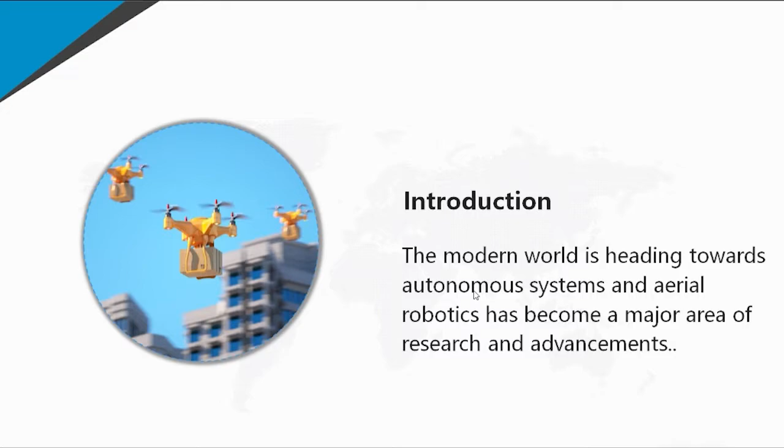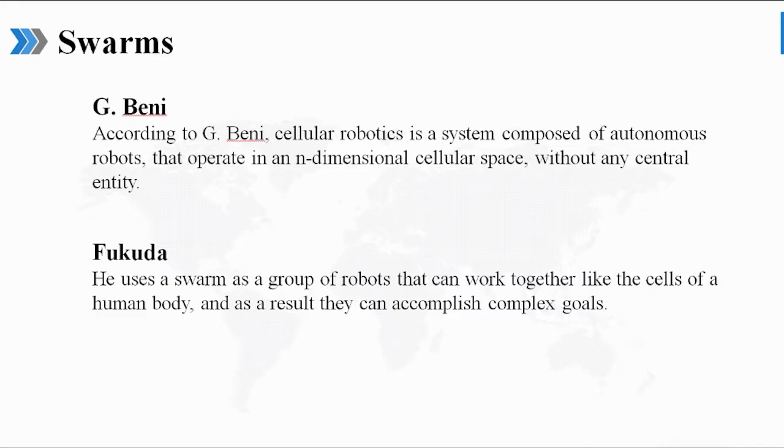Okay, this is swarms. Swarms are a collection of many UAVs or drones. This is a drone, and a lot of drones can be a swarm. Okay, aerial swarm robotics. Aerial swarm robotics are unmanned aerial vehicles that can operate autonomously. Every individual robot has its processing, communication, and sensing capabilities.

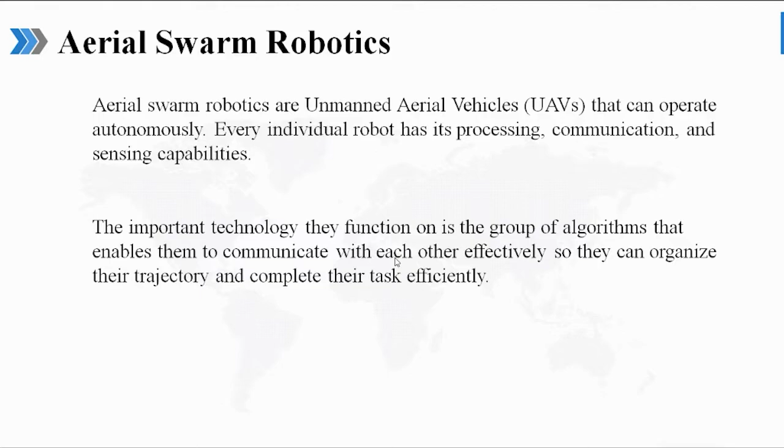Advancement in the field of materials and communication makes way for aerial swarm robotics. It is an important technology. They function through algorithms to achieve complex goals, enable them to communicate with each other effectively, plan their trajectory and accomplish their missions.

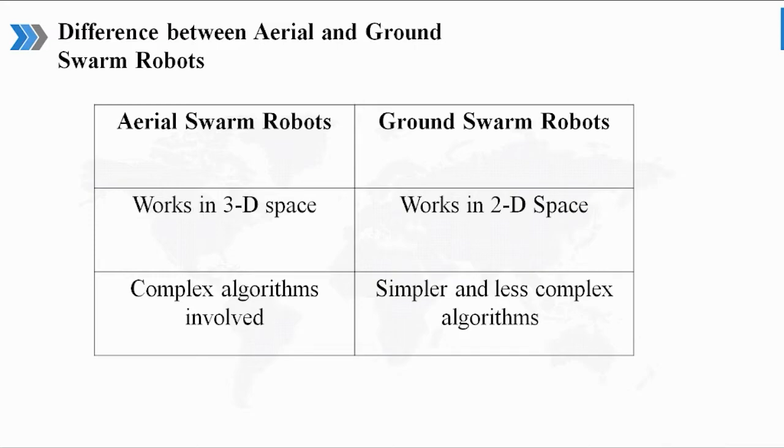Okay, difference between aerial and ground swarm robotics. Aerial swarm robotics can work in 3D space. Ground swarm robotics work in 2D space. Aerial swarm robotics have complex algorithms, and ground swarm robots have a little less complex algorithms. They may have simple algorithms. Okay, these are some characteristics of aerial swarm robotics, 3D and swarm autonomy.

The technology of aerial swarm relies on effective communication between aerial robots working in the same 3D environment, performing the same or multiple tasks depending upon the requirement. The notable innovation for swarm is the group of algorithms that enables one individual swarm to communicate with another individual swarm to sync their flights by themselves, plan their direction, and facilitate their journey in such a way that general goals of the swarms are accomplished.

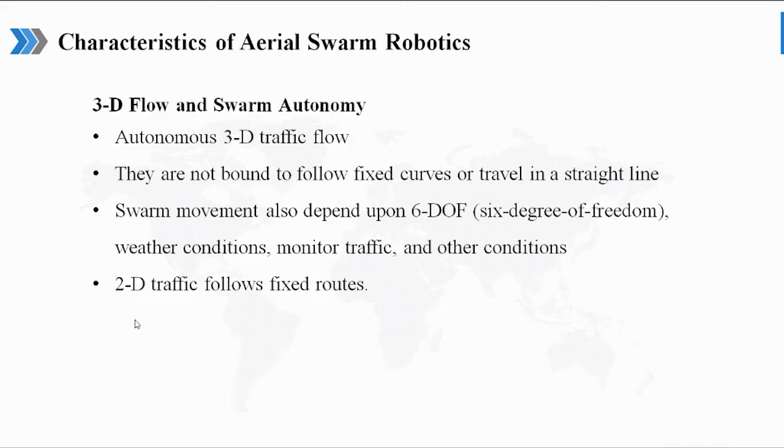2D traffic flows on fixed routes. 3D has a lot of directions, 6 degrees of freedom. Next slide. Okay. Scalability through hierarchy and multimodality. For working of swarms on a large scale, we require complex and efficient algorithms.

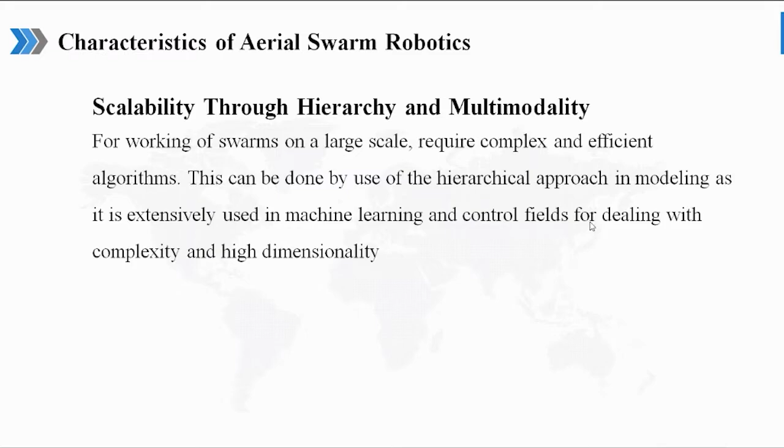The notable innovation for swarms is the group of algorithms that enables one individual swarm to communicate with another individual swarm. Communication is a main factor in aerial swarm robotics, and this is also done extensively in machine learning and control fields for dealing with complex and high dimensionality.

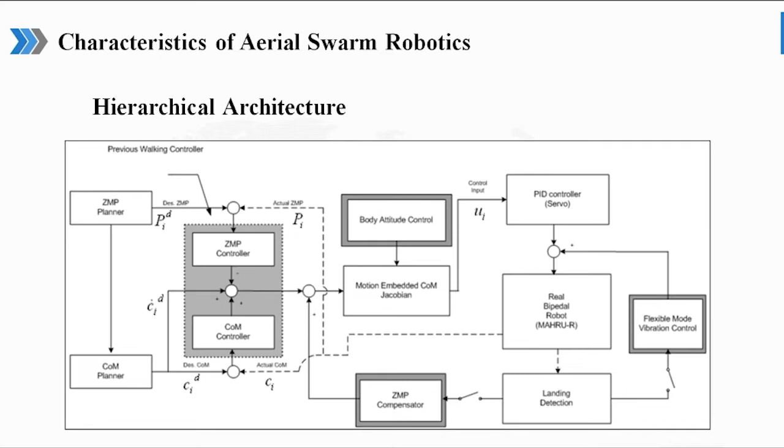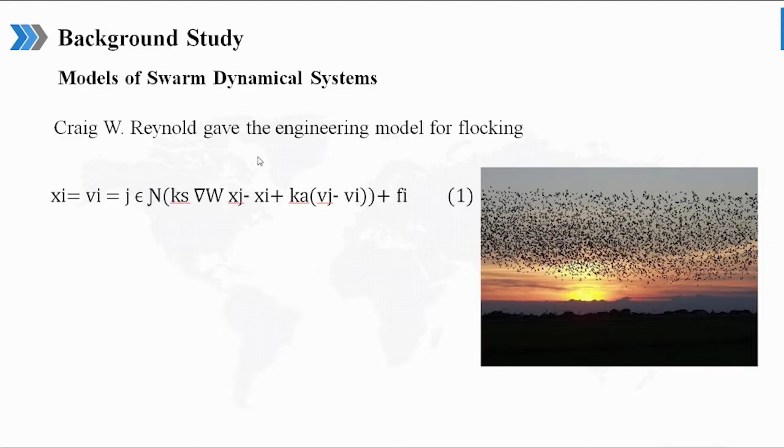Characteristics of aerial swarm robotics: hierarchical architecture. Okay, this is a table of how aerial swarms in a hierarchical architecture work. Excuse me. Okay. Models of swarm dynamical systems. This is an equation presented by Craig W. Reynolds for the engineering model for flocking. Next slide.

Leader selection and sensor placement. It is very important to assign a leader because it also helps in better communication. If a swarm is taking orders, say from a human operator, it is better just to give the information or orders to the leader than to give information and orders to every single one of them. It is better to just give it to the leader so everyone can follow the leader, and it is more convenient.

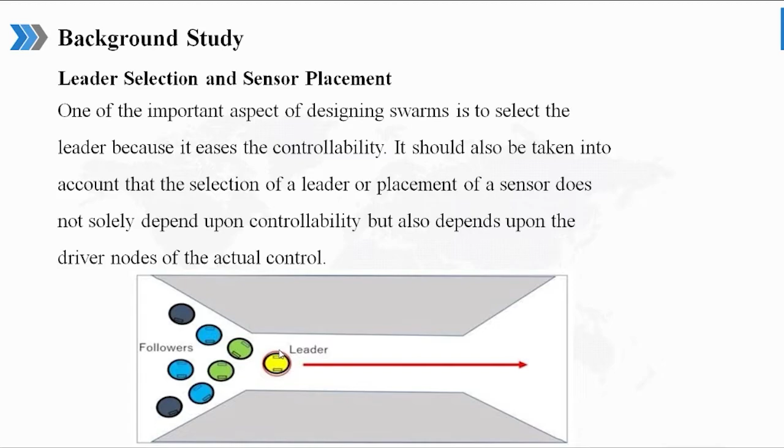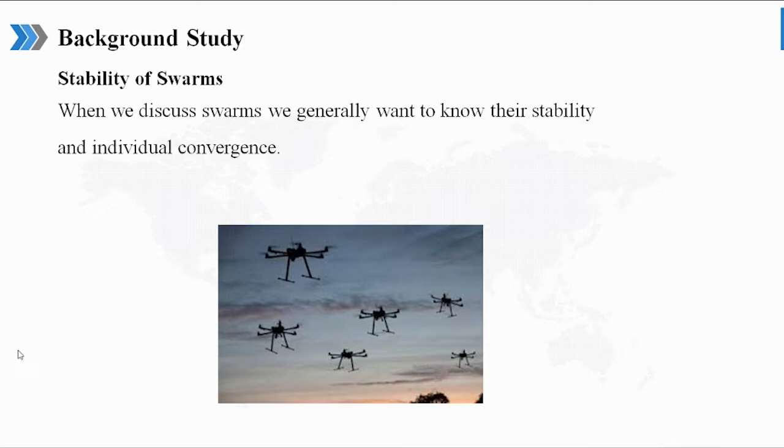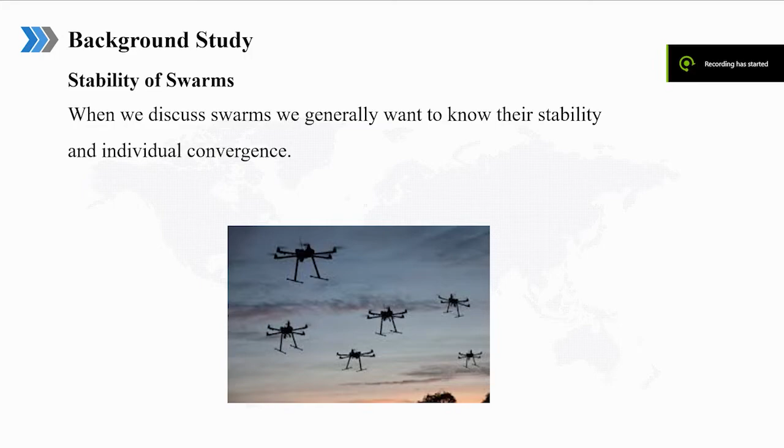Thank you, Umar. I hope now you have the basic idea of aerial swarm robotics. So now we will make it more practical and we'll discuss the working and application of swarms in 3D worlds.

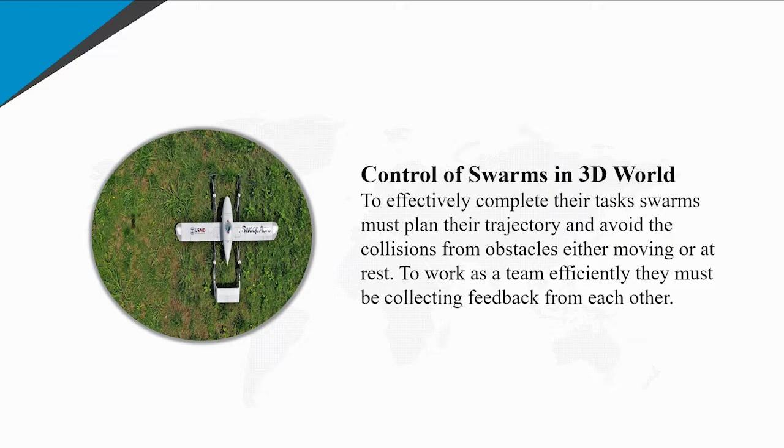So first of all, we discuss the swarm trajectory. So what is trajectory? Trajectory is the motion path that the swarms will take, and to design or model the trajectories, we cannot use popular randomized algorithms or rapidly exploring random trees, because they are not suitable for 6 degree of freedom aerial robots, as they are less accurate and use numbers randomly.

To design the optimal trajectory of swarms, we have to consider a number of things like integrated control effort, maximum single robot travel distance, last arrival time, and total distance or time between the two robots. Like in the swarms, what is the distance between the two robots, or with what velocity they will be traveling.

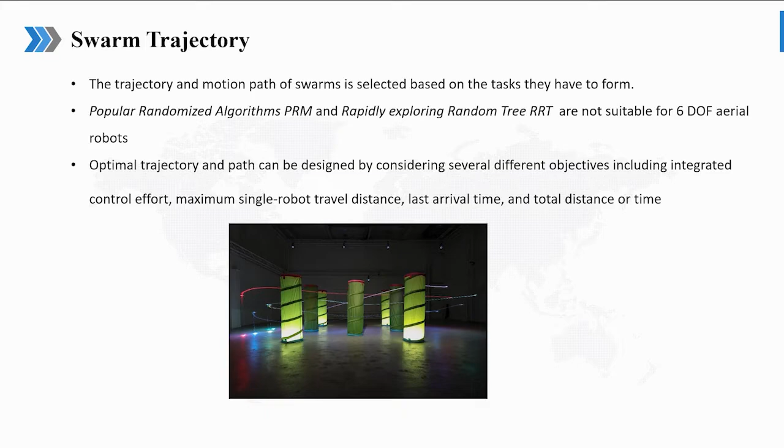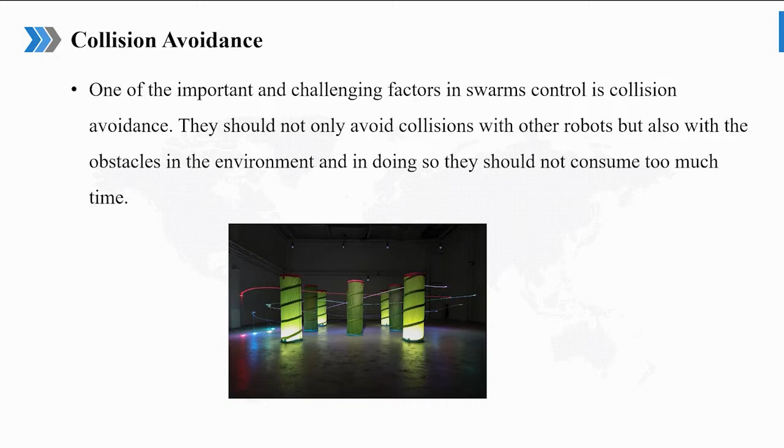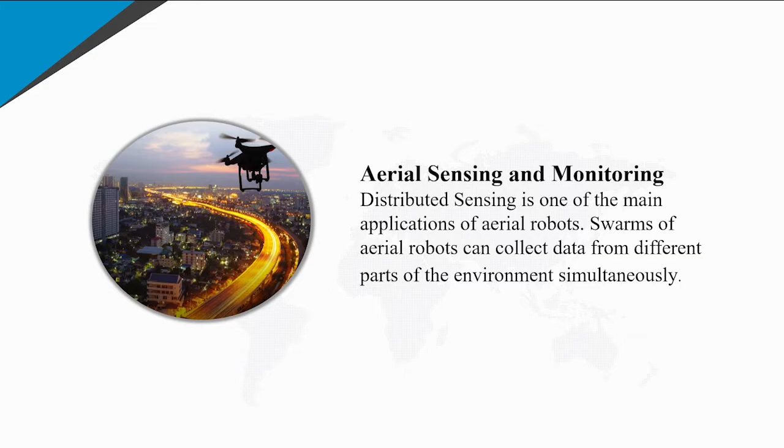As said previously, distributed sensing has three major focal points: targets, space, and maps. In targets, the single area or particular target is the area of consideration of the swarms, and in space, the whole environment in which the swarms are working is the area of consideration. The goal is to collect as much data as possible. And in maps, in mapping, the swarms not only cover the whole area but also create a contour map of it.

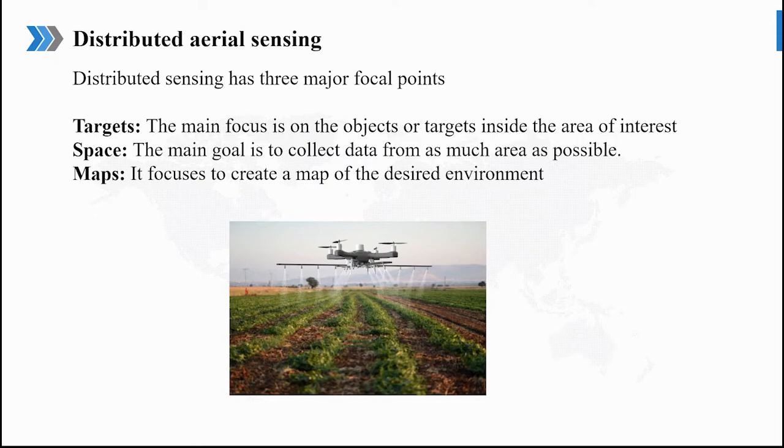So target search and tracking has two main categories, that is static and dynamic targets, single and multi targets. In static targets, the target is at rest or motionless and the swarms are collecting data from it, and in dynamic targets, the targets are in motion or moving with some velocity or constant velocity. In single targets and multi targets, multi target has two subcategories, that is targets of known numbers and targets of unknown numbers.

So designing the algorithms of the swarms for known numbers is much easier than for unknown numbers, because in known numbers we know how many targets there are, and in unknown numbers it is much more difficult because at times the targets outnumber the swarms, so it is much more complex and difficult to design the algorithms for it.

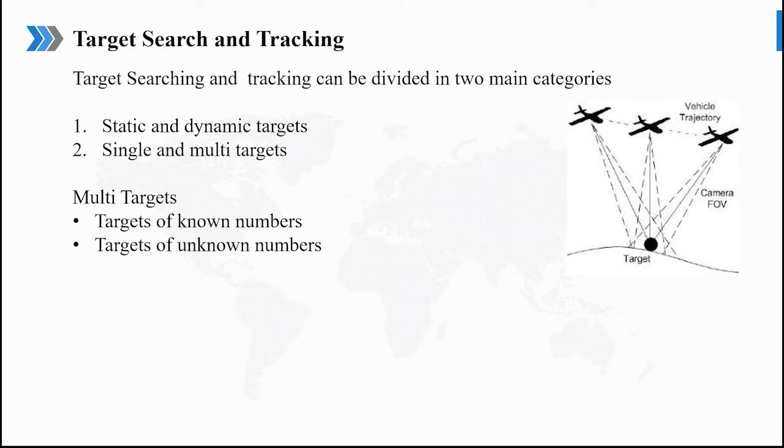So as you all know, drones are mainly used for surveillance and mapping purposes. Surveillance is similar to tracking but it is more area centric, and there is a small difference between surveillance and mapping. In surveillance we just collect the data from the environment and the idea is to cover as much area as possible, while in mapping we not only cover the environment but also generate contours and maps from the environment. So there are subcategories of mapping: sparse mapping, dense mapping, and LiDAR based mapping.

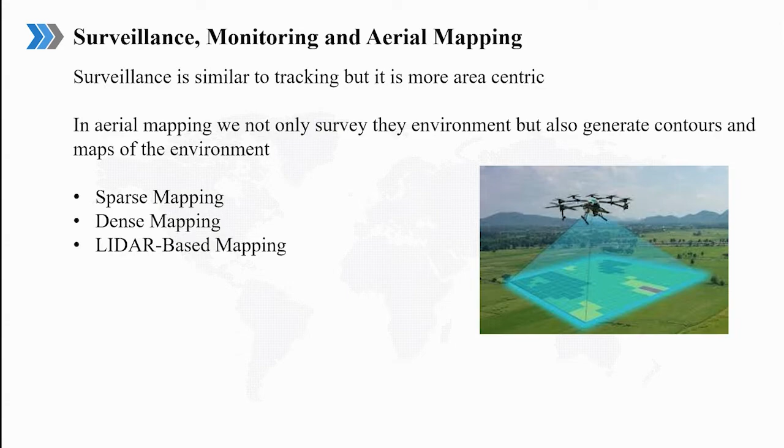Sparse mapping is a collection of data from scattered areas, and dense mapping is collection of data in a more organized form. LiDAR is another commonly used sensor for mapping applications. The full form of LiDAR is light detection and ranging. It is a remote sensing method used to examine the surface of the earth.

So, our fifth and last part is technology for swarming. In the recent past, aerial robots have become a hot topic for research and development, and as hardware and software technology is getting better, it is opening new roads for the development of swarms. A possible greater application of swarms I saw recently was in a movie called Spider-Man Far From Home, in which the villain uses a swarm of robots to create a virtual or fake environment, and from the outside it feels real. So now swarms are developing their application in the cinematic industry as well.

As you all know, the most important topic nowadays is energy consumption and energy conservation. So power management plays an important role in designing swarm robots. The basic idea is to reduce the launch and landing span of the drones, mobile or static charging, and health monitoring of the fuel or battery levels, because we want to make the drones or the swarms as efficient as possible.

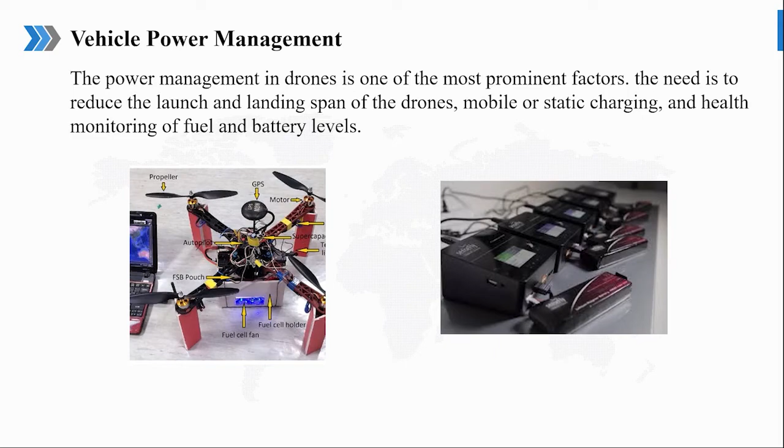Communication infrastructure. The communication infrastructure plays a huge role in the drone's ability to perform the task in the real world, because researchers often select short range but low power consumption communication protocols, because they conserve energy and increase the flight time, such as Bluetooth, UWB, or standard Wi-Fi. For building up the communication infrastructure, they are utilizing other low latency, high reliability, and high bandwidth systems.

So, after studying all these things about swarm robots and getting to know about swarms, the upcoming technology of the world, we have to give a small public service message: when life gives you a drone, try not to crash it.